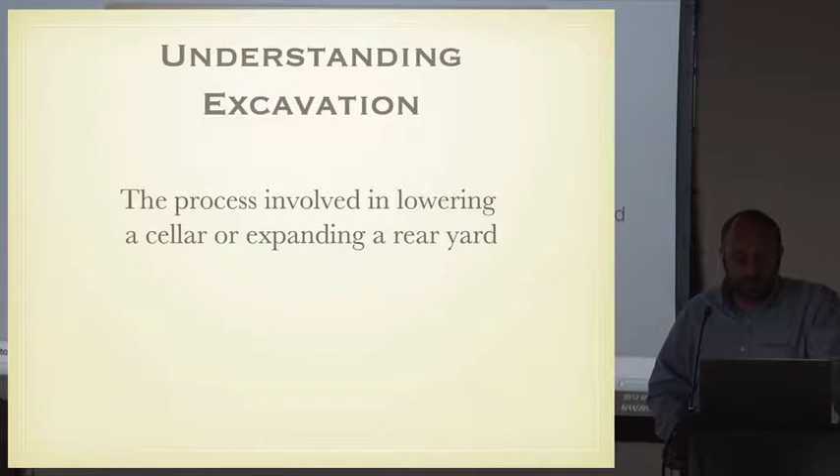So now, if a neighbor wants to do an excavation, they have to have a design. That's a great thing if you are the neighbor, because you get the opportunity to see something on paper before it goes into the ground.

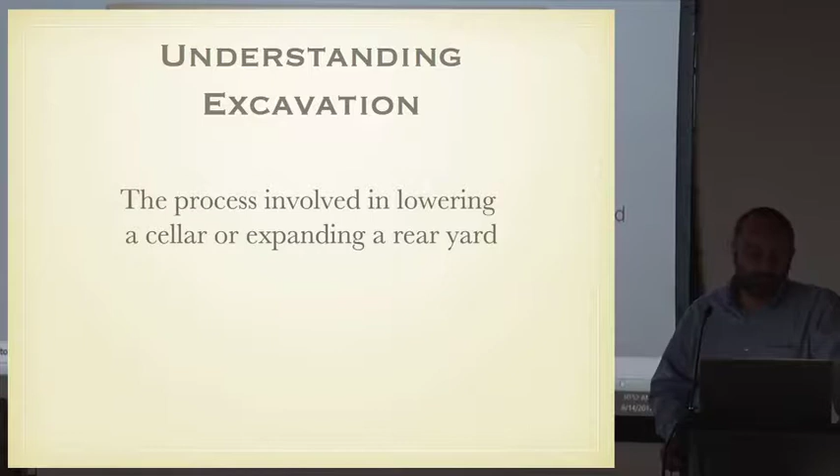So if this is an excavation that you are proposing, or if this is the excavation of the neighbor, the process is more or less the same. There has to be an investigation done first. That investigation requires doing physical probes at the site to gather data about the soil.

It also requires doing some probes above ground, which are things that Don or structural engineers usually look for. But for us, we do want to understand what the soil is, where the water is, where bedrock is, what existed previously on that site. Was there a 6-story at one point and now it's 3? Was there a 2-story at one point and now it's 5? All of these play a significant role in the design of the supportive excavation down the road.

So once the investigation is done, and this is required by code, a report would be issued to the client. And in the report, the geotechnical engineer includes a recommendation on what to do and a statement of what they observed at the site. Simple things.

Then we move to the design. The design involves support of excavation. Support of excavation is what allows the client or the neighbor to go down for a pool, for a batting cage, for whatever they want to do at that location.

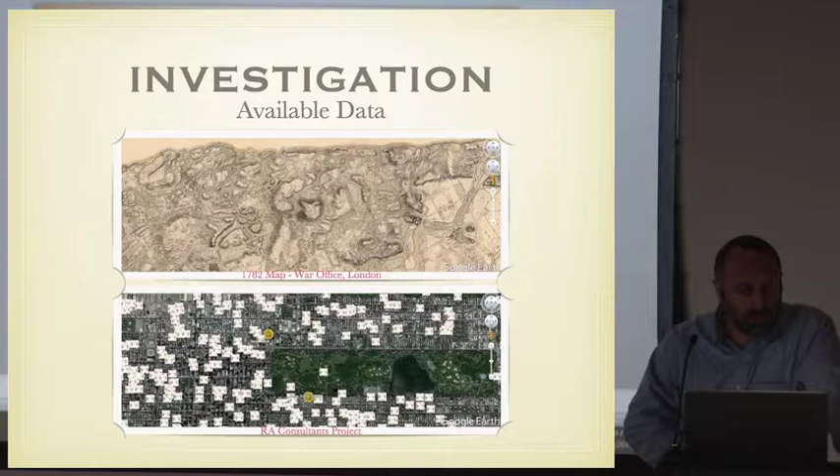That would be a machine drilling into the ground, sampling the soil that comes out. An engineer classifies it, figures out exactly what it is and how strong it is. As geotechnical engineers, we classify soils for material strength, not for environmental aspects. The environmental aspects are a completely different animal, which we're not going to discuss here.

When you do those borings, what's the schedule for how many you have to do? The 2014 New York City Building Code treats renovations as new buildings if you're changing the load by as little as 5%. So for any change on the load of the structure more than 5%, it's a new building. And if it is, there's a requirement for a minimum of 2 borings up to 5,000 square feet, with an additional boring for every 2,500 square feet after that. So a typical 20 by 100 lot, which is 2,000 square feet, needs 2 borings.

And if the addition is less than 750 square feet, you only need 1. There's a slight addition in the number of borings if this is a pile job, not a shallow foundation. They're all spelled out in Chapter 18 of the Building Code.

So the borings are very important. They tell us what the soils look like at depth. We go down to rock in many cases, or at least to a depth where all the stresses from whatever we're planning to do have completely dissipated, because stress dissipates with depth. So for a 1 cellar excavation, which is 12 feet deep, we will take the boring at least 40, another 30 feet give or take below where our footing is, at which point there's no change in stress on the soil.

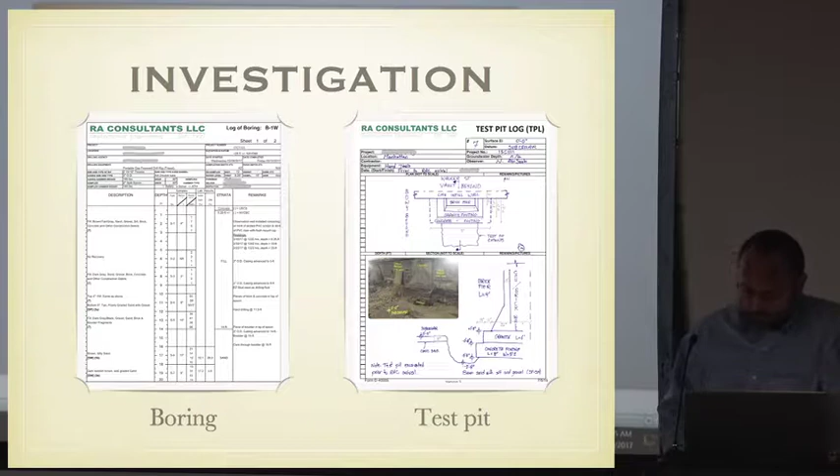So the investigation is documented in a geotechnical report. Not much is seen here, I apologize.

We can go do borings, we can go do test pits, and if you're the neighbor and you ask for borings and test pits because now you know that the construction has to have them, and they give you borings and test pits, they're hiding something. There has to be a report where these borings and test pits come to in context.

The engineer may say that I did borings, I found water, or I found organics, and I recommend that you do not do a shallow footing here. I recommend you go to piles, or I recommend that you do waterproofing in this area.

You need to know these if you're the neighbor. Obviously, you need to know them if you're the client, if you're the owner. But if you're on the opposite side, and somebody just says, okay, here are the borings, that's not enough. You need to see a report. If they don't have one, you need to ask them for a report.

And as a neighbor, you have the right to say no for anything. So you do not want the adjacent construction to affect you. Ultimately, that's the goal. You weren't looking for that construction. You don't need the noise. You don't need the vibration. You're not looking for compensation for whatever damage. You just want to be left alone, which is your right.

So you have the right to say no. However, saying no doesn't mean that the construction cannot go on. And that's where Don was trying to give his opinion, which I agree with. Sometimes it is beneficial to be part of that discussion. For example, in your case, I'm not sure how the construction transpired, but if the neighbor had provided a geotechnical report, or if you were involved maybe early on in the discussion and you had a peer review done for those drawings, there could have been a chance that some of the damages were minimized or eliminated altogether.

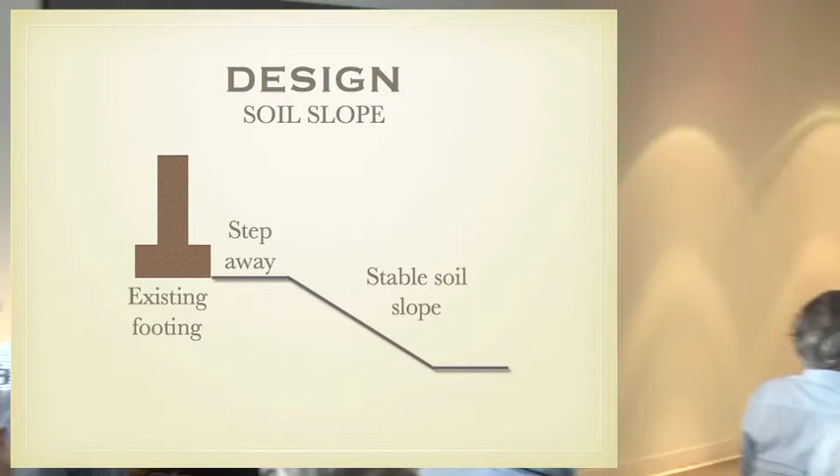Underpinning is usually the best way to support a building. We are constructing a new footing under an existing one, and then we are positively transferring the load from the old footing to the new, where at the end of the process, we know for sure that the new footing is taking the load. So underpinning that is done right is the best, when it is necessary by design. All the other alternatives are compromises, which oftentimes result in more movement.

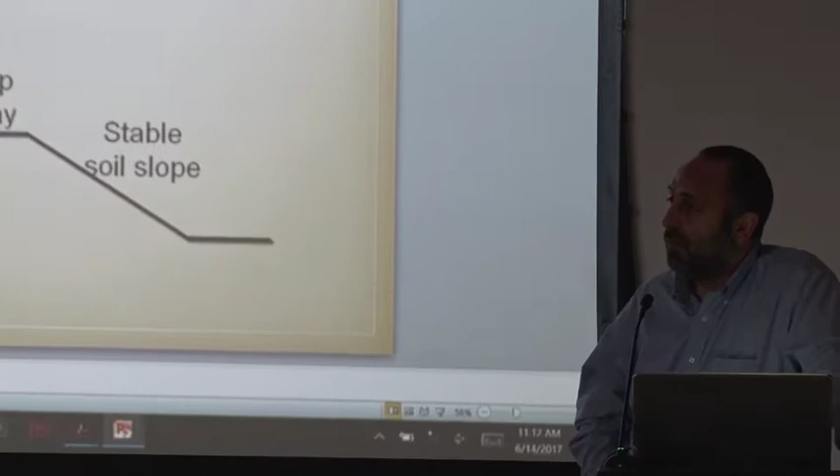This here, for example, is if we do not want to allow the neighbor to underpin. The neighbor has the right to step away, they're going to lose some space, and put their new footing somewhere here. This slope is defined based on what we know about the soil—sand will have a different slope than till, different from rock, different from peat, etc. There has to be a bench and a slope.

Oftentimes the neighbor wants to maximize the space, so this slope will go directly in front of the footing and it will be steep, maybe 1-to-1. Or even if it was flat, the excavation would be deep enough, or there would be water included in the mix, at which point there is movement that's going to result from this approach.

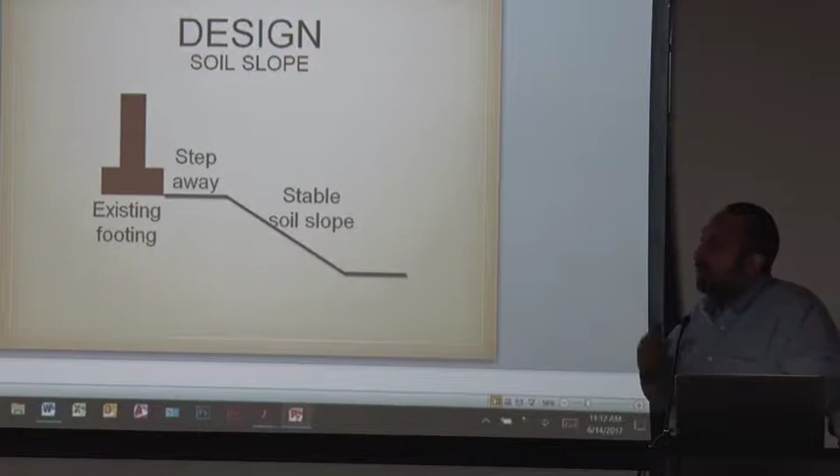This movement can also be addressed, so it goes back to proper design. Anytime any of this is going on, the wall needs to be monitored—vibration and survey—and if the movement exceeds, it doesn't even have to exceed the 1/4 inch or the 1/8 of an inch. If this was landmark, the engineer has to determine that a trend is starting to develop, at which point they can do something. The wall can be shored.

On a recent job where Don and I worked, the contractor had not put a shovel in the ground. For that particular job, we were both on the same side. We knew that the building was leaning, and it was landmark. We had transit authority to deal with. I advised the client that they need to brace the neighbor's building before they do anything. Don came in and designed an elaborate bracing system that supported the neighbor to minimize the risk of when we start to open up the soil.

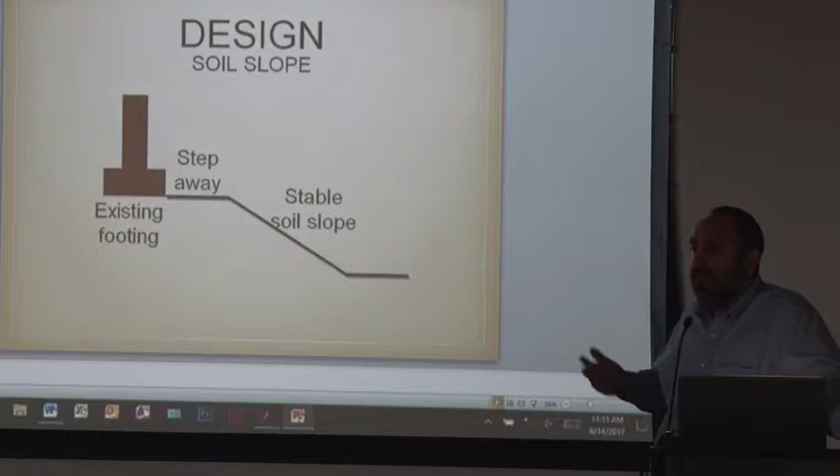And going back to what Don mentioned earlier, anything that we do at a site constitutes a change, and a change results in movement, so they can be careful. In that case, they may have needed to brace your building before they did anything. They can do it from their side.

So sometimes I would like to go a step back. It makes sense sometimes to agree to underpinning. Even though on a first look it may not sound very appealing, there is risk, but if you do agree to go into that process, you will have much more control over the outcome.

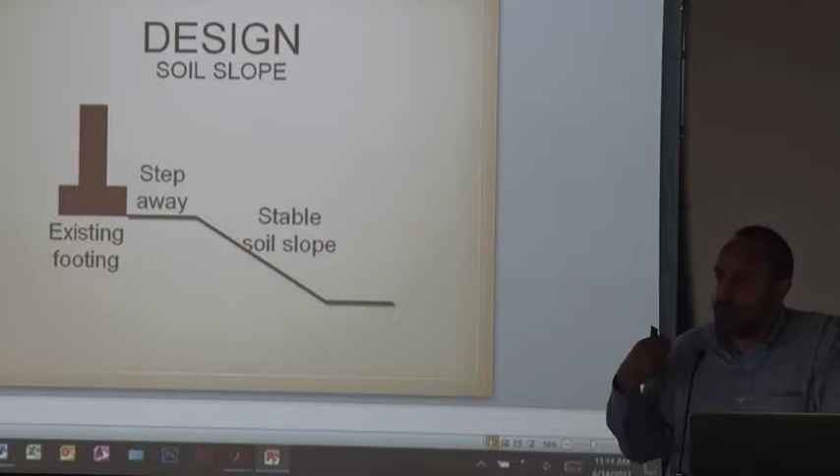You can tell them, I need the vibrations to be sent to my engineer—and I'm going to skip through slides—but all of these associated costs are typically paid for by the construction. So if you own that building, you're paying a consultant and a lawyer and an architect to review what the construction next door is doing. You have the power to have them pay for it, so it's not going to be like you're paying a lot of money out of your pocket to do that.

So when it comes to design, going two steps back, one option is to do nothing. So we excavate down, we find that the footing is 3 feet deep, and we're only interested in increasing our cellar height by 2 feet. In other words, we don't have to do anything. Excavate the 2 feet, we're not going under any of the footings, we're in good shape.

All the other options that I'm listing here, and there are more that I'm not listing, are a compromise. So we can do a segmental wall, in other words building a stiff wall in front of the footing on the construction side. This causes a loss of space, and there is some associated movement with it, which is more than underpinning. Soil slope, we just discussed, has a similar effect, losing more space here.

Rock excavation, by code—if the code specifies rock, it divides rock into 4 classes, Class A and Class B are allowed to be used with a straight rock face cut. So if you hear that the neighbor has rock, that doesn't necessarily translate into 'yes, go ahead and excavate, nothing is going to happen to my building.'

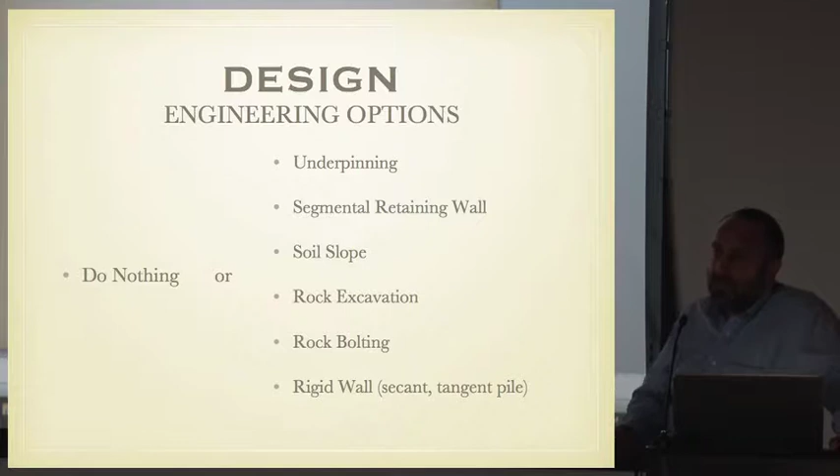And then there are other alternatives. This is a whole family of rigid walls, which includes secant walls, tangent walls, soil mix walls, etc. They're intended to be rigid, intended to carry the load from the building as the excavation advances. They do a decent job, but not good enough. You'll see those are usually associated with the most movement on the list I'm putting up here.

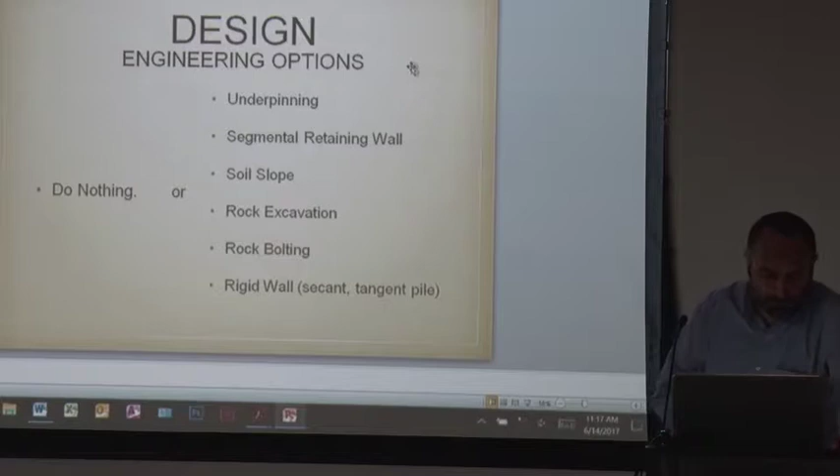Underpinning, for those of you not very familiar with it - we're going on, this is an existing footing right here, supporting the wall, party or not, in this case it doesn't matter. We're going to excavate adjacent and then tunnel underneath, excavate under the footing, and pour this new concrete footing underneath. The width of it has to be minimum 2 feet. If this footing is more than 2 feet, then the underpin has to match the footing - it could be 3 feet, 4 feet, 5 feet. The width of this underpin has to be minimum 2 feet, but it has to match the footing also.

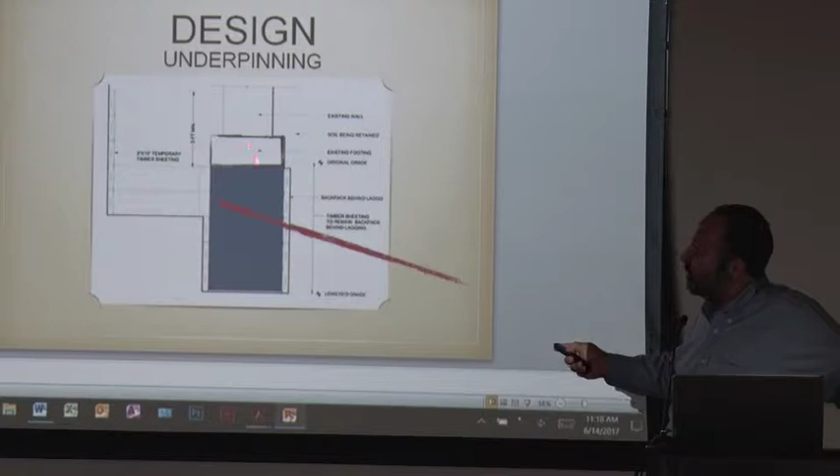So we cannot take a footing that is 2 feet and make it 1 - it doesn't make sense. Also, this footing was sitting on some soil - could have been sand, fill, whatever. We have to always take the footing from a condition to a better condition. You cannot go from a condition to a worse condition. We always have to guarantee that. That's why underpinning, if done right, is always the best option moving forward - because now we know for sure that this building that was sitting on 3-ton soil before we started is sitting on 6-ton soil when we finished.

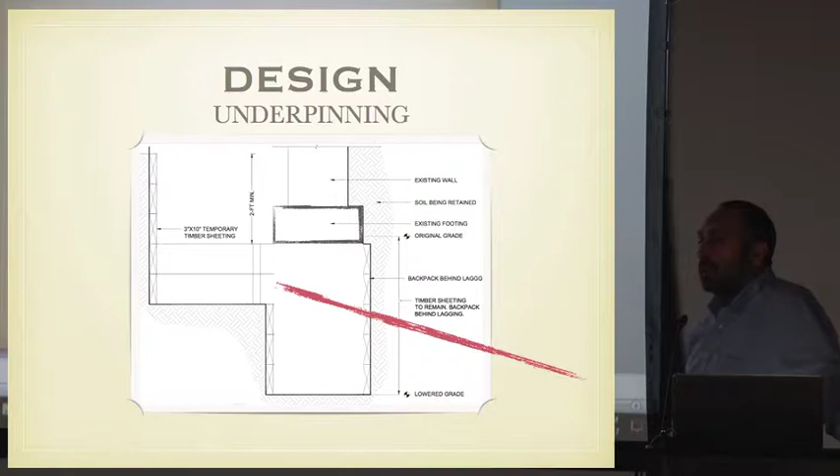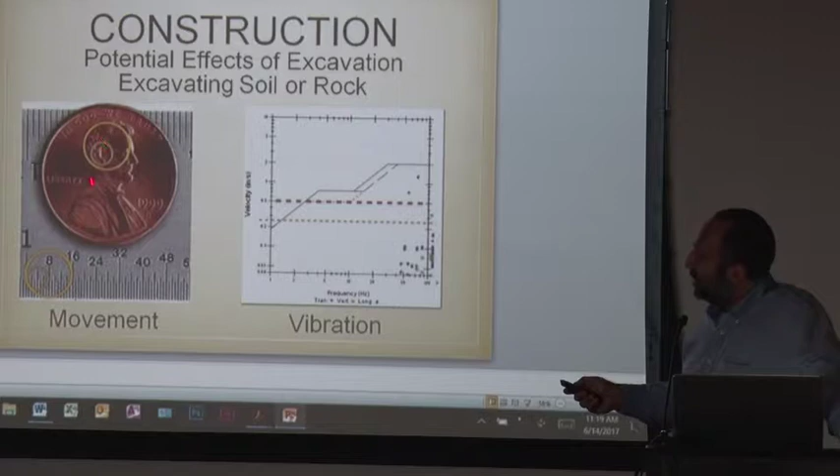So how much movement is allowed on the adjacent structure? For landmark buildings, very, very little. The yellow circle is the maximum movement allowed by code, which is a quarter inch - so this is how it sits on a penny, covers Lincoln's head. The smaller circle here, which covers his ear, that's the warning. If movement happens in excess of that, construction has the responsibility to notify the neighbors that something is going on - pay attention, change. If it reaches the yellow, a quarter inch, construction is supposed to stop. This is all spelled out in the code, chapter 33, and in the TPPN 10/88.

Back to the TPPN 10/88 - now the DOB considers the 2014 code as a replacement for TPPN. Like Don mentioned, they didn't capture every aspect of it, so you'll find especially in historic buildings that engineers will reference both. The DOB wants us to just address what the code has, but we still have some issues that are not covered by the code - we refer to TPPN. TPPN is especially useful when we're dealing with rock excavation. It doesn't really apply that much when we're dealing with soil excavation, soft stuff, but rock is where vibrations come into play, and that's where TPPN applies.

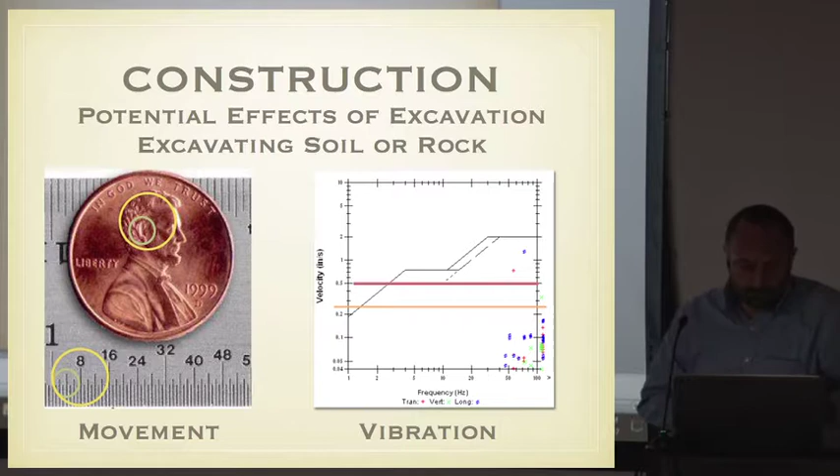So back to underpinning - underpinning has to be done in patterns. If we open under the entire wall at once, the wall will move down, guaranteed. So what we do is open in small sections. The width of every underpin is limited to 3 feet if the footing is rubble, and limited to 4 feet irrespective of the condition. So no more than a 4-foot opening, and this is based in great part on empirical data.

Underpinning has been done for many, many years, hundreds of years, and when the excavation starts to exceed the 4-foot mark, the building experiences more settlement - the chances of movement increase. So in the city, it's either 3 feet or 4 feet - this is the standard, and it has to be constructed in pattern. The patterns are such that when 2 pins are constructed, there is always a space between them big enough that there is no effect in the stress. That space is usually 12 feet.

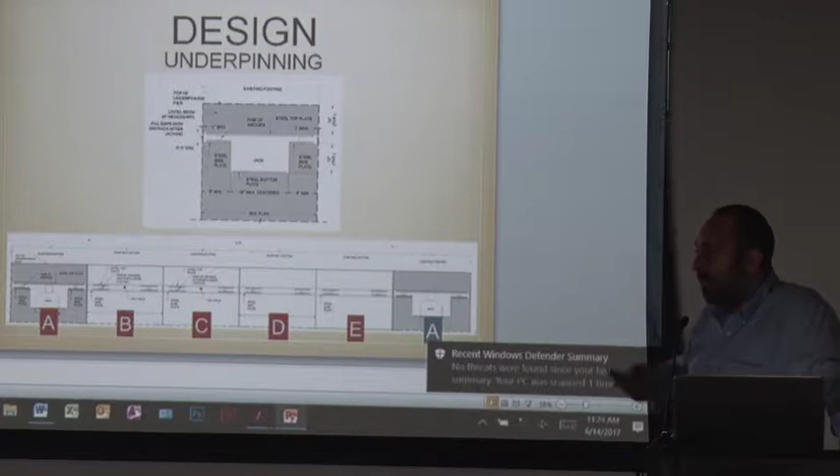The purpose of jacking is not to move the building up. The building is serving here as a weight, a counterweight. The purpose is to push the pin down. Once this jacking happens, this space here will open up more than it actually is, until such point that we start to see the slightest upward movement, which is defined by code as 1/16 of an inch, the thickness of a hair.

Once we see that the building moves up a hair, we stop. Then they shim it, they wedge it, and they come and fill this void back with concrete. This is the guarantee that the pin is not going to be moving ever again down. So it would have been, at that time, experiencing much more stress than the weight of the building.

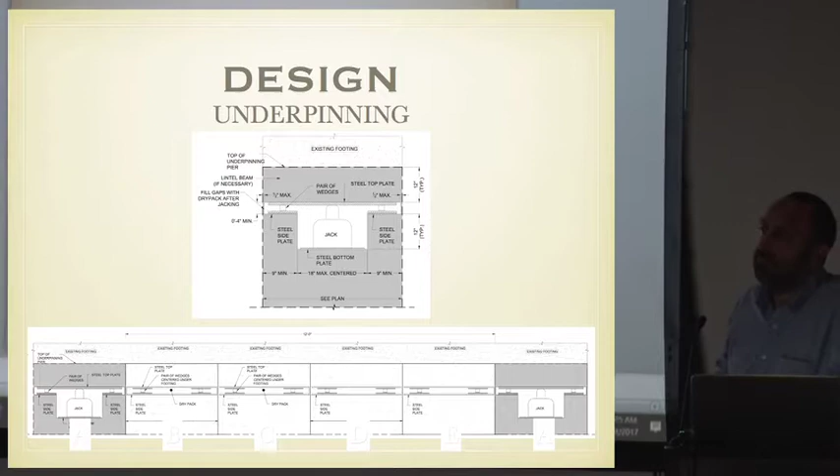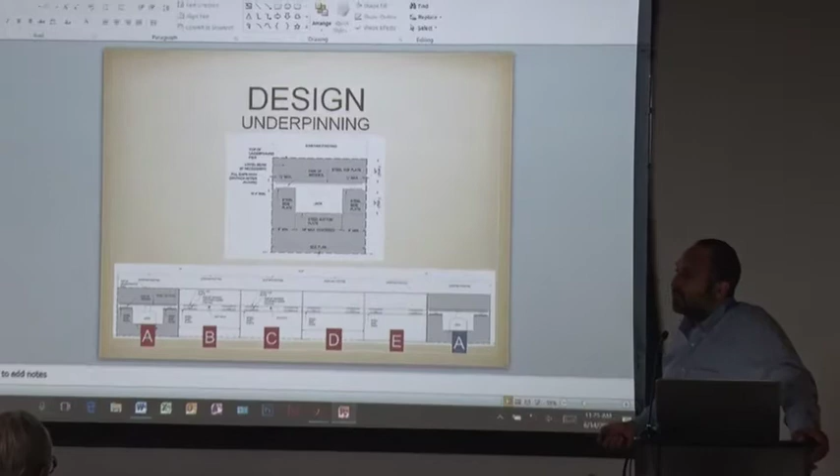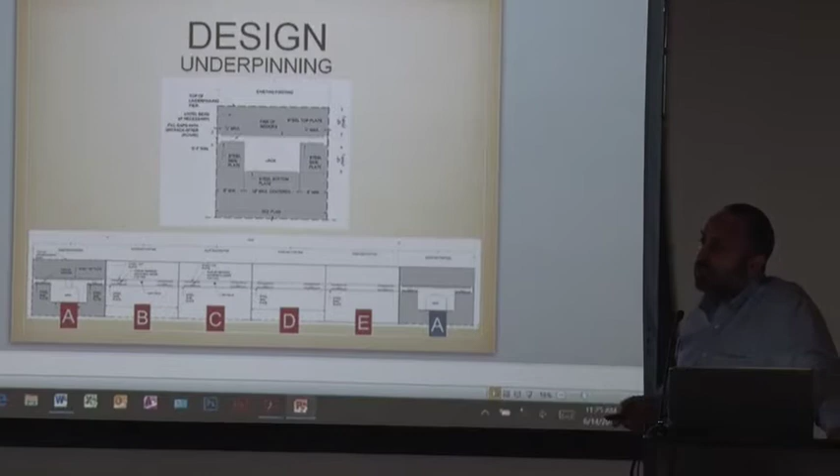Is this detail in response to the earthquake zone that we happen to be in New York State? Not necessarily. So this would work for California or India? This works anywhere. This detail is not tied to a specific earthquake zone. This is an intermediate process that provides us the confidence that the underpin is doing its job. The jacks here are shown on the A's only, but the jacks can be shown on any other combination. It's just an example.

So segmental walls, this is the construction of a concrete wall in front of the neighbor. So we're losing space from our side.

The appeal of this option is that the SOE, which is the temporary support of excavation, and the permanent wall are combined into one. So we are constructing the permanent wall at the same time as the SOE, and that would be 2 foot thick. The alternative would be to do an SOE, which is 1 foot thick, and then come and install a new structural wall in front of it, which takes space. There is a small savings in space when we use this approach.

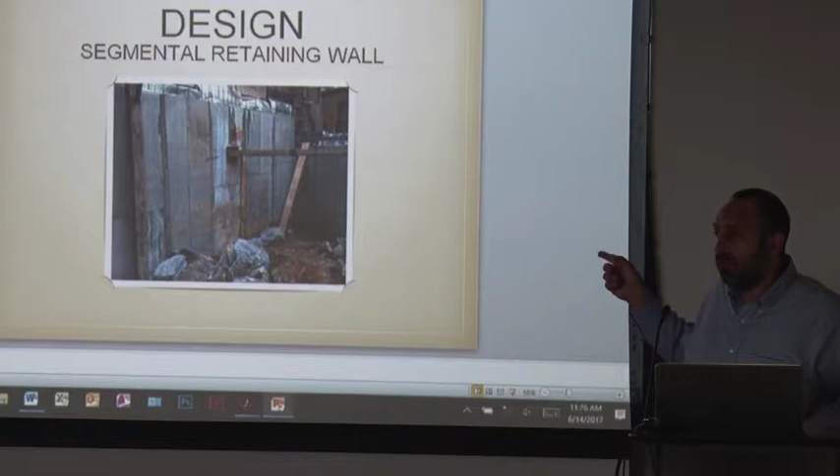And if it's designed properly, the likelihood of movement with this wall is more than the likelihood of movement with underpinning, but less than all the other rigid walls that I mentioned earlier.

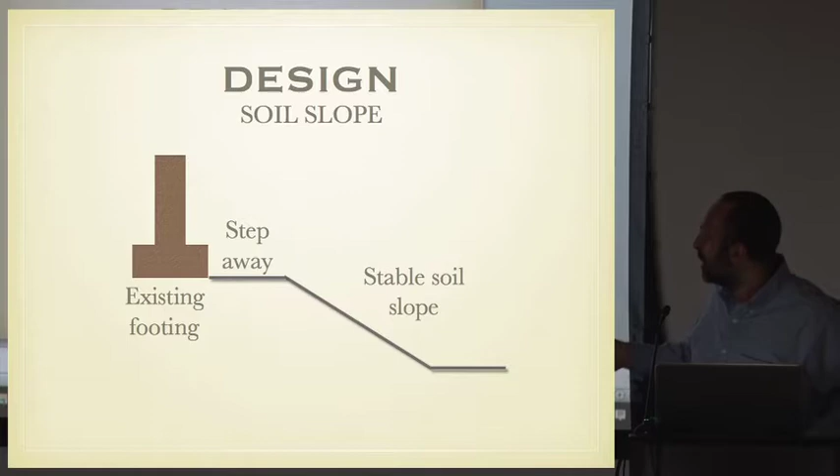We went through the sloped excavation. This comes at the most loss of space. Here you're spending the least amount of money because you're not doing anything here, just excavating. You're losing a lot of space, and it's not a guarantee that movement is not going to happen.

And then there is rock excavation. In the Upper West Side and in the Upper East Side, rock is relatively high, so this is quite common. There are two types of rock excavations that I need you to remember if you're dealing with these kinds of issues. There is saw cutting and there is line drilling.

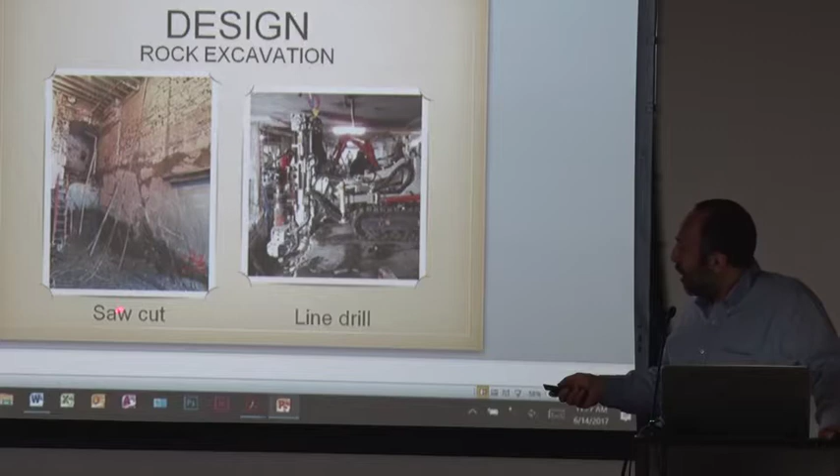Whenever we're dealing with rock, one or the other has to be implemented in order to minimize effect on the neighbor. Our job as engineers is not just to design. We don't go into the design intending to vibrate the neighbor unnecessarily, or to move their building unnecessarily. Our design is usually to minimize the risk on our client and on the neighbors. It's our responsibility as professional engineers to protect the public.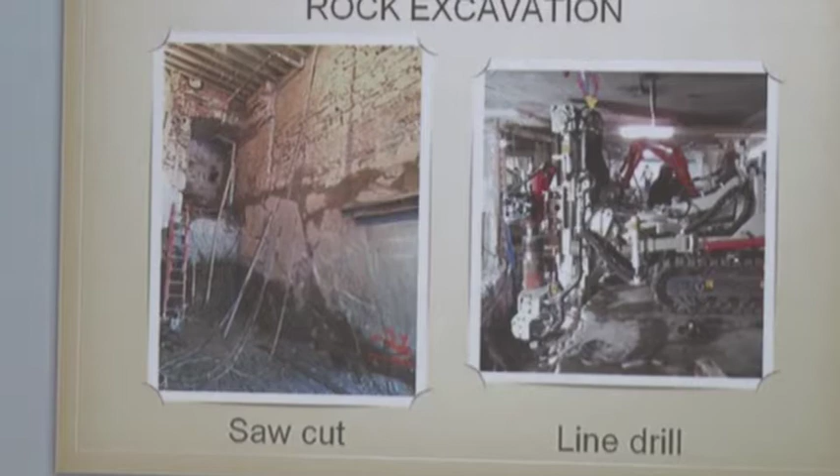So you will see on drawings often that the face right next to the neighbor has to be saw cut. Saw cutting, just what it means, it's a chainsaw or a circular saw that can be handheld or operated by rails attached to the face of the rock or by an excavator that will go in and smoothly cut the face of the rock. If I was to zoom into this picture and it was good resolution, you'll find that the face of the rock is very nice. You cannot distinguish it from good concrete. And this here happens to be 1A rock.

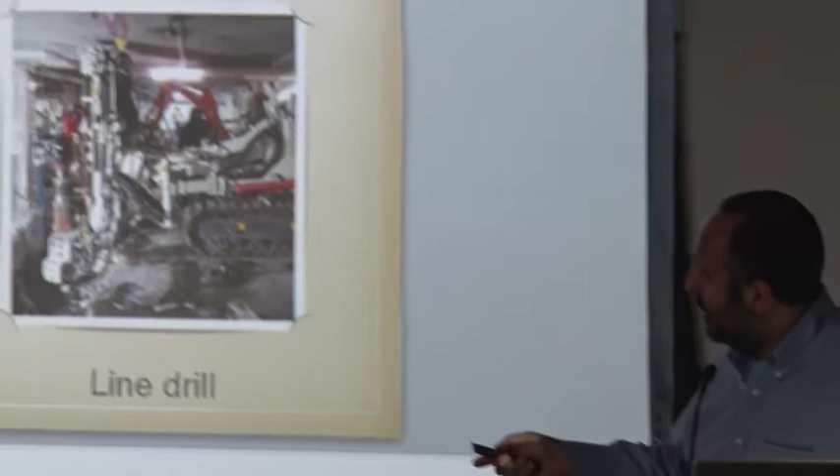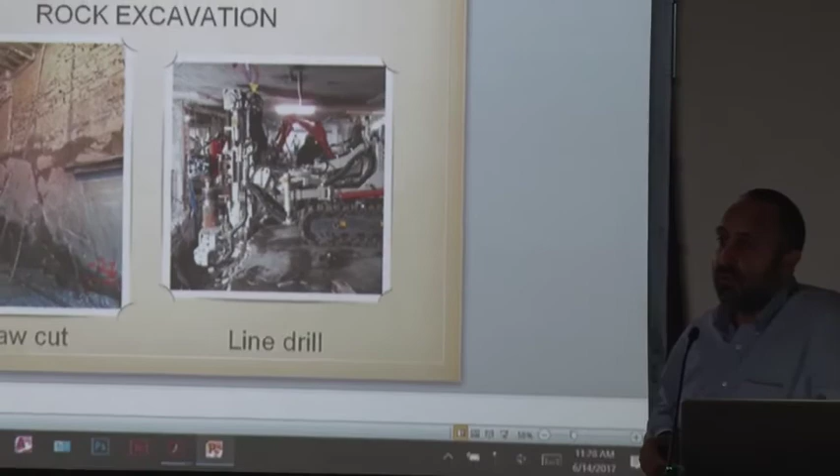The other option is to do a line drilling. A machine, sitting inside a confined space, will go and drill a hole next to a hole, next to a hole, next to a hole, right around the entire perimeter where rock is to be excavated. The idea is to create an air gap. So when they go in with a jackhammer, there is a separation, and the vibrations introduced into the rock to break it by the jackhammer are not transferred to the existing walls, into the neighbor's building.

If this is not done, if saw cutting is not done, and if line drilling is not done, then anything that they do with the rock will cause the buildings to vibrate. And the human senses are much more sensitive to vibrations than the buildings, so humans will feel it right away. And then it's only a matter of time before things start shaking off of shelves, paintings start falling off of walls, and things start moving. So these are necessary, very necessary.

One more thing regarding rock excavation. Groundwater table wants to be at elevation 0, that's where the sea is, or elevation 5, depending on which datum you're looking at. So whenever it gets a chance, that's where it wants to be. If rock is high, which is the case in many sites in the Upper East and the Upper West, water will be flowing on the surface of the rock down to the river level. That's the way that it goes.

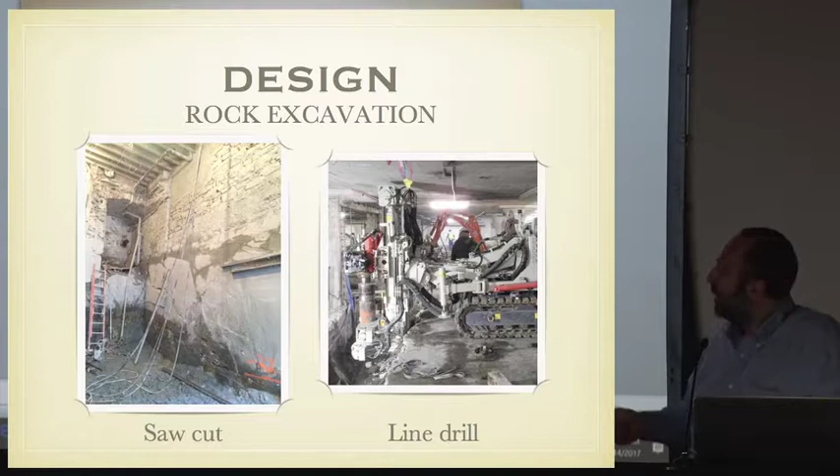So if we go and open up a cut into the rock, it becomes like a swimming pool. There will have to be constant pumping of water from that rock excavation during the time that it is open. This water does not necessarily affect the adjacent neighbors negatively. It's much different than if this excavation was happening in soil under the water.

If we are excavating in soil and we have to draw the water down for the excavation to happen, every foot of water that we draw down is the equivalent of adding a story onto the neighbor's building. So if we're drawing down 5 feet of water, we're adding 5 stories. History is on our side in this regard, because most of those buildings have seen a fluctuation of 3 feet, which is normal rain events, water surges, etc.

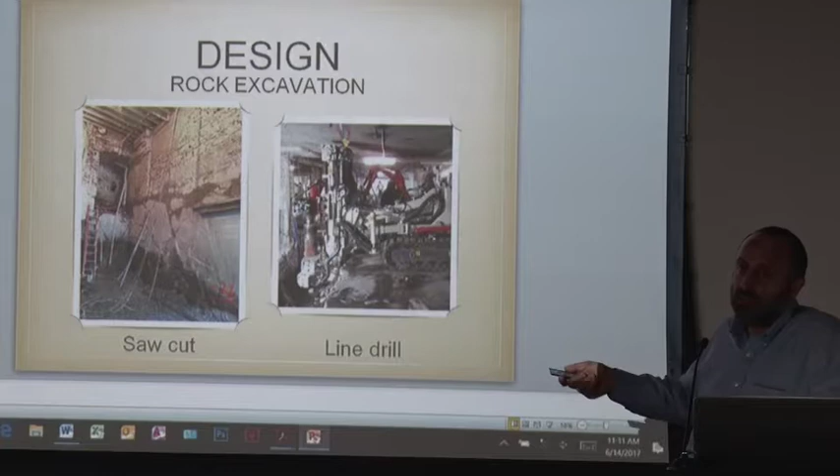So if we are just playing with the water table by 3 feet, give or take, the buildings have seen those changes in stress and it wouldn't affect them much. But if we're going 10, 20, or 15 feet, then there has to be a cutoff wall where we keep the water outside our excavation at an elevation that's not changed, and we're only pumping the water out from inside. This is what rock does for us here, just by virtue of being there.

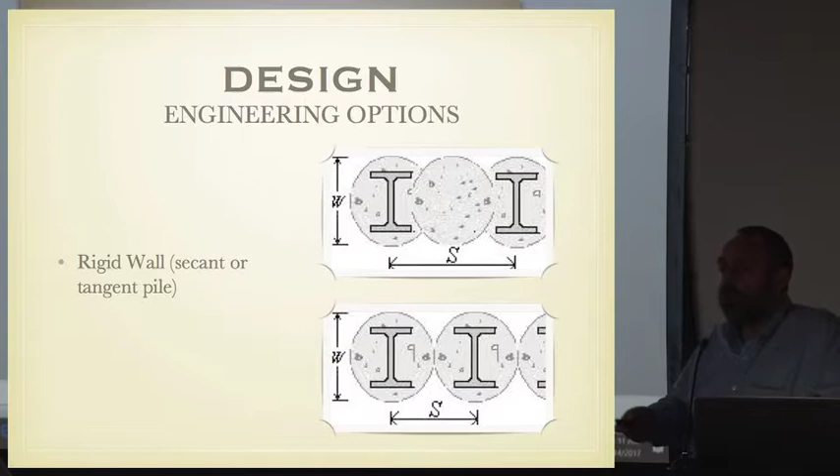The construction team, your neighbor, or you want to stay away from them as an owner because they're very expensive, much more expensive than underpinning. So if you're the construction owner, that is your motivation to not do these. And if you're the neighbor, my recommendation would be, if the neighbor does that, then you're guaranteeing yourself movement. You're much better off allowing them to underpin.

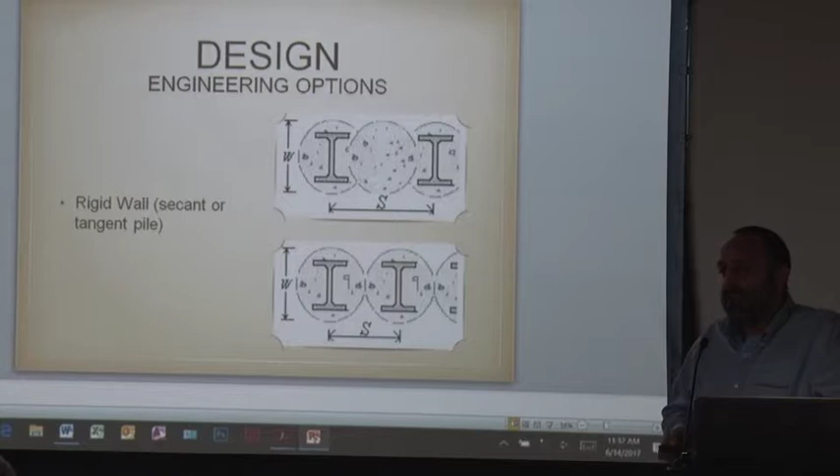There is one other thing for underpinning that's very rarely discussed. If the neighbor is planning to construct a cellar and a subcellar immediately next to your building, going 20 feet down, by virtue of them doing the excavation, this allows you in the future to excavate down to match them with minimal supportive excavation on your side, because they've already done the work. So that's a plus that's usually hidden. If you don't want to use it now, that's fine, but you have that potential. Somebody has already done the work.

Also, when the neighbor excavates under your wall, or just exposes a wall that was buried without even going under it, it is their responsibility to waterproof their wall that's coming up, and your wall in turn. So if they're going under the water, and there was a discussion earlier about more water coming into the basement as a result of the construction, somebody's doing something wrong.

There are two ways to deal with water. One way is to resist it in place. That requires constructing a watertight space under the water, which we refer to as a bathtub. It often includes installing blindside waterproofing in such a way that no water can go in, and that's a scenario where you do not have to pump.

However, that's an expensive way to do waterproofing. Oftentimes when somebody's spending $15 or $20 million on a pool and batting cage, they go that route because they don't want water coming in. But sometimes we're just flirting with the water table, very close to it. It's not going to affect us all the time, or maybe it's going to affect us, but only for a month of the year, and there are alternatives that are cheaper.

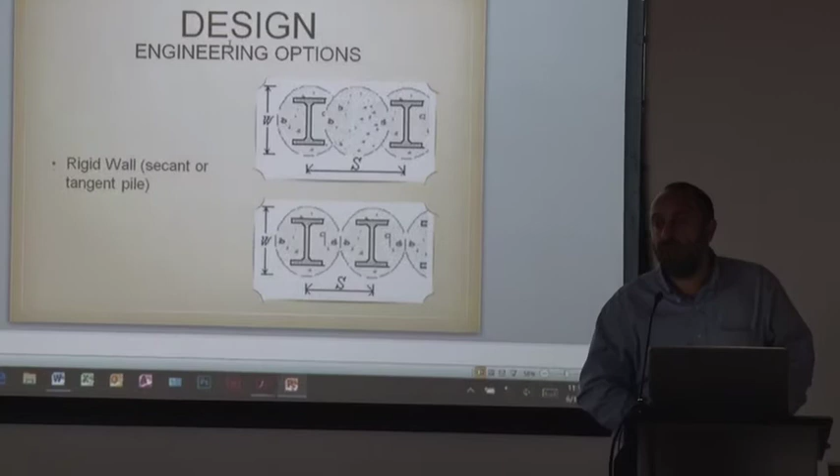When dealing with landmarks specifically, usually we're working inside existing buildings, which means we have limitations on what kind of equipment we can bring in, making constructing something like a secant wall or tangent wall extremely difficult. These walls require machines with enough power to drill into the ground. So even though those can double as SOE and structural, they're not usually doable within the confines of a landmark building. That's where I brought in the segmental wall.

The segmental wall design - we've done numerous of these walls successfully. We use them often in rear yard expansions, much more so than immediately adjacent to 4 or 5 story brownstones, because in the rear yard we have more tolerance for what movements we can expect. And they double as SOE and structural wall.

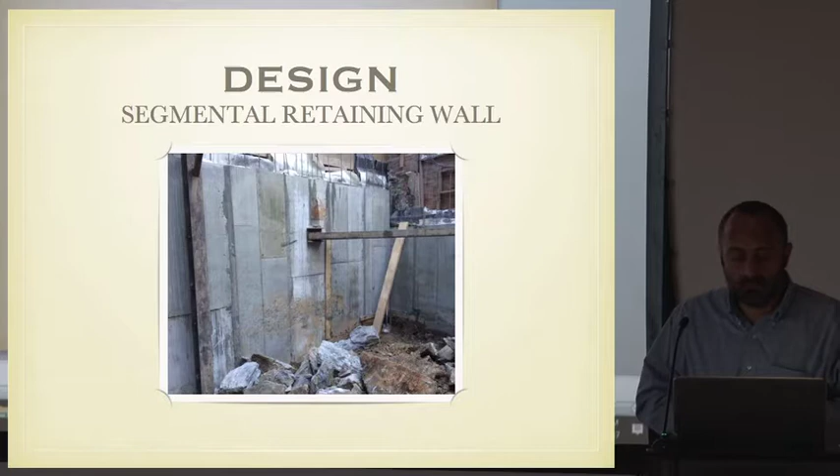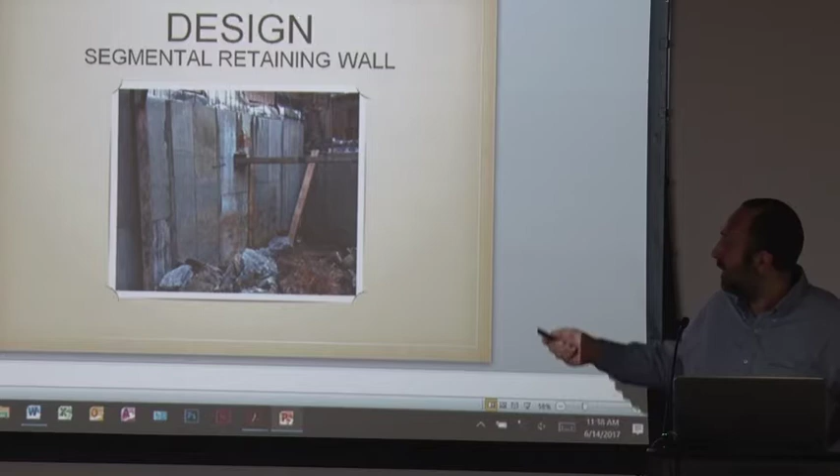You can also see, if you look here at the top, there is waterproofing behind it - blindside waterproofing behind that wall. It's constructed in sections as the wall comes into play. This wall is constructed in vertical sections, so 1, 2, 3, one next to the other, like that.

I think we're running out of time, but I'd like to jump to the conclusions.

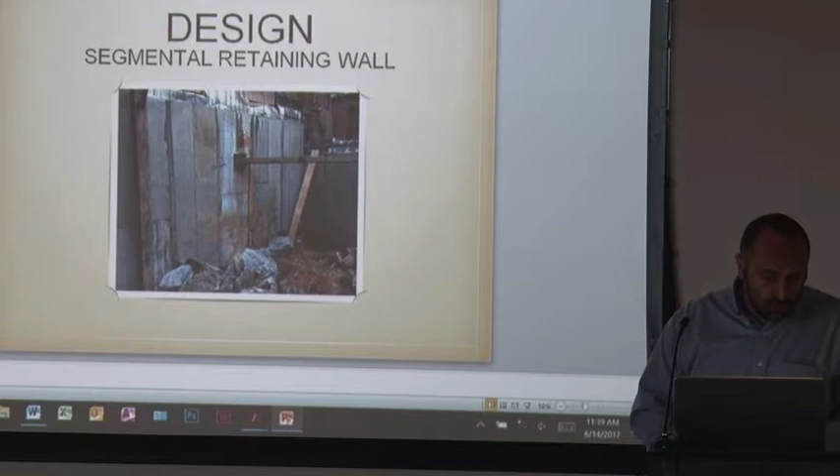There are many issues during construction. If you're dealing with a competent geotechnical engineer, structural engineer, and a competent design team, you'll find that during construction, that engineer is at the site much more than you think they need to be. That's not because they're doing something wrong - it's because that's when you need them there. You need the engineer at the site during construction. The design can be very good, all the T's crossed and I's dotted, but construction is where problems happen.

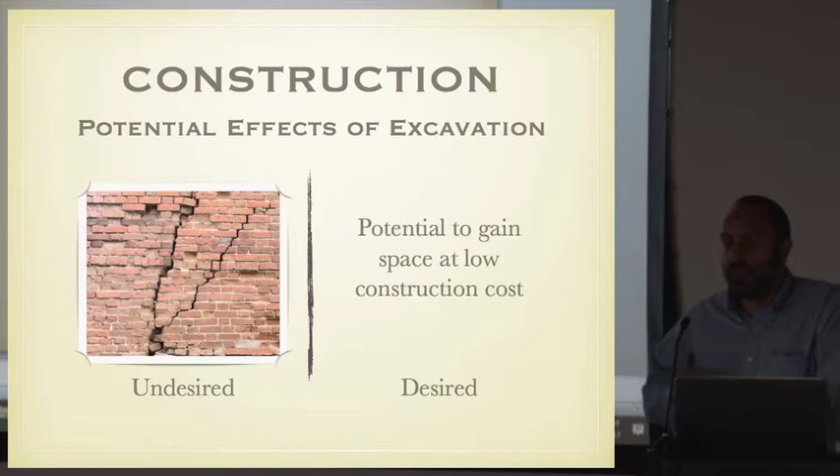So you do not want to have issues like this happening in your building. If they do, they can be fixed - you just don't want to go through that experience. It's not enjoyable, and it can be avoided, which is just as important.

You want to be in a position where the neighbor comes in, puts their foundation, goes out, with minimal effect to you, and you want them to do it very quickly. If somehow this can be facilitated, whatever that means, then you're gaining from it, and gaining the potential of, in the future, at some point, expanding your space, which is tremendous. You don't have to put as much effort into it anymore.

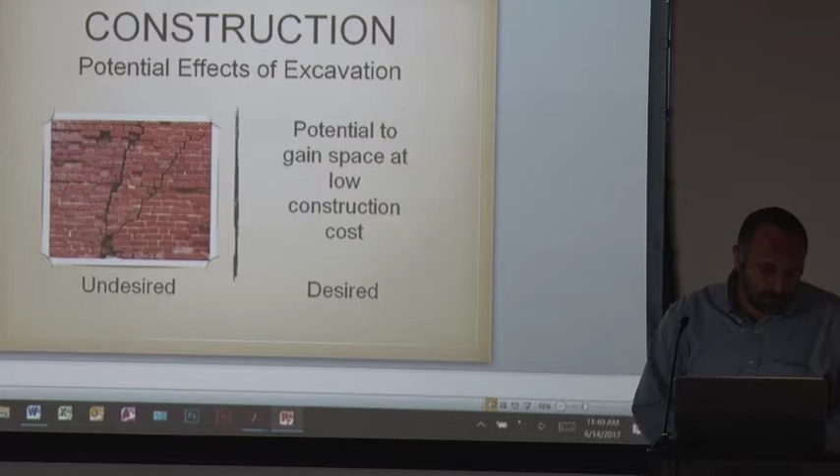If everything else fails - if you have an engineer you thought was good, but they got busy, or sidetracked, or got married, or traveled, whatever, and you cannot find them - just call the DOB. The DOB does not have enough staff to support everything.

The way that they operate is they go sporadically to job sites, and they rely on phone calls. Somebody complains, like the squeaky wheel, it's going to get the oil first. Someone complains, the DOB comes and visits, and they investigate.

You don't want to complain too much or prematurely, because that will hurt you. If you complain once, twice, three times, the third time they'll say Joe Schmo is complaining again, we're not going. So you don't want to be in that position, but you can always call them and they will come. Usually the excavation unit will send somebody within the hour or within a day. They will take a look, and if they agree with what you're telling them, they will stop the job until you get the opportunity to get an engineer or to review the condition.

And I'd like to leave you with that.

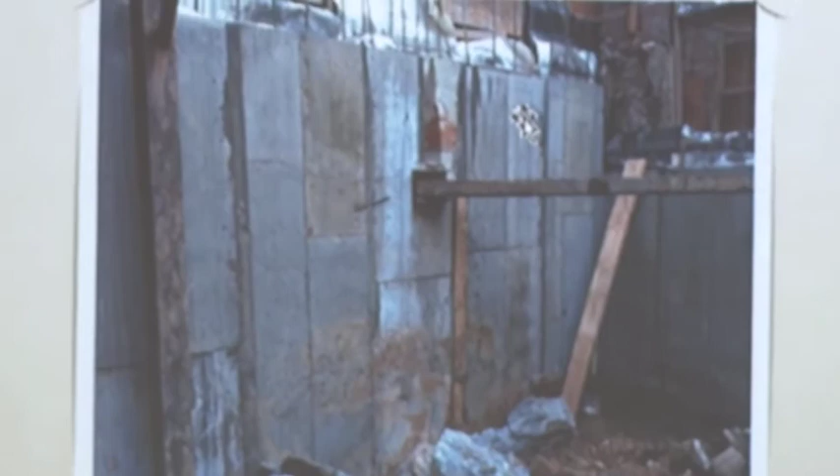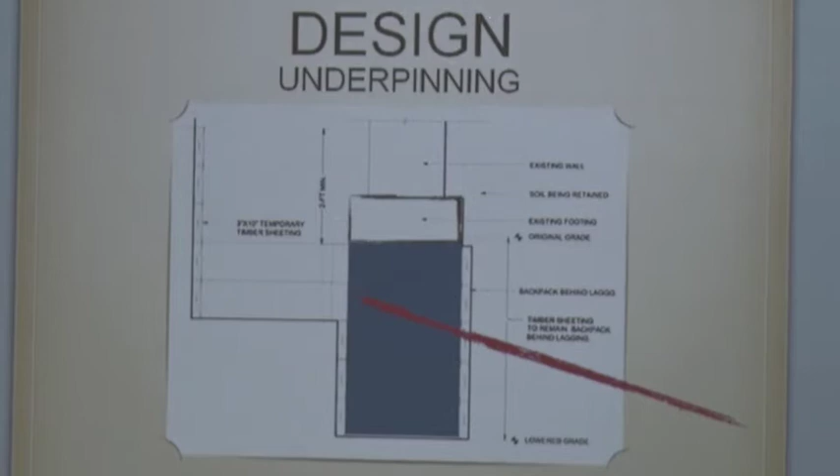The construction—I'm going to go to the underpinning detail. So this is a typical underpinning detail when someone constructs an approach pit and they go under the footing and construct new footing, which is the underpinning. This red line here is a tieback. Sometimes we need it if the pin is too high. If you were to assume that this wall doesn't exist, using the same concept, this is a 4-foot wide timber sheeted box. Somebody can excavate—this length here can vary, it can be 10 feet, 15, 20. They'll go down this entire length. You have timber, so technically there's the thickness of the timber that's always going to be at the property line—2 inches lost. But the wall can come and sit in here without the footing on top, and the timber stays at the property line here. And then the next section comes in, and the next section comes in.

And if there's, say, a two-story slab on grade addition where you're proposing to put the timber—this is a neighbor of mine actually proposing to excavate 11 feet down, basically right along the property line. How would they actually do that excavation and support my structure? So the best option is to underpin.

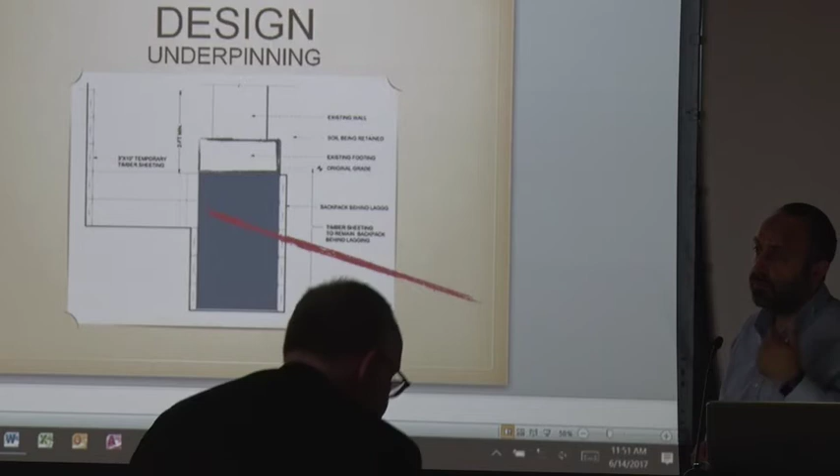That is the best approach, because this way you get the guarantee that your building now has new footing. The second best option—so that would be actually on my property? Yes, completely under my property? Correct. They will go—let's say this is the wall of the addition—they will go under the wall. So your property line would be right here in that case. And then they will construct their construction on the other side, on their side. But the next best approach is, this is your footing and the property line is right here.

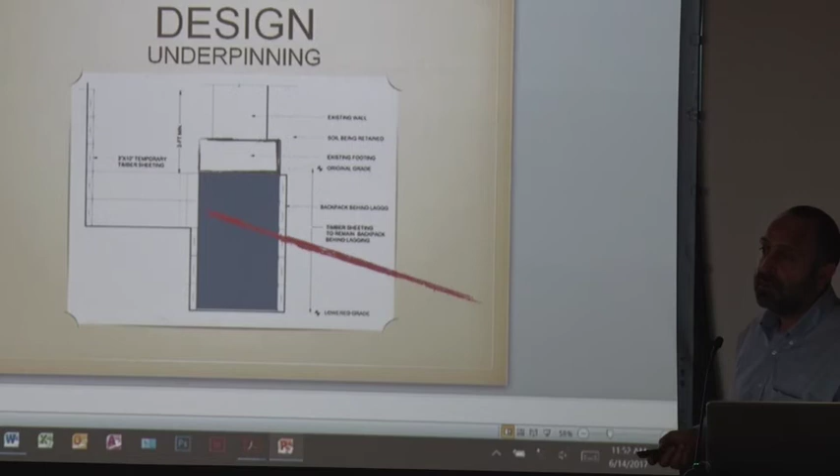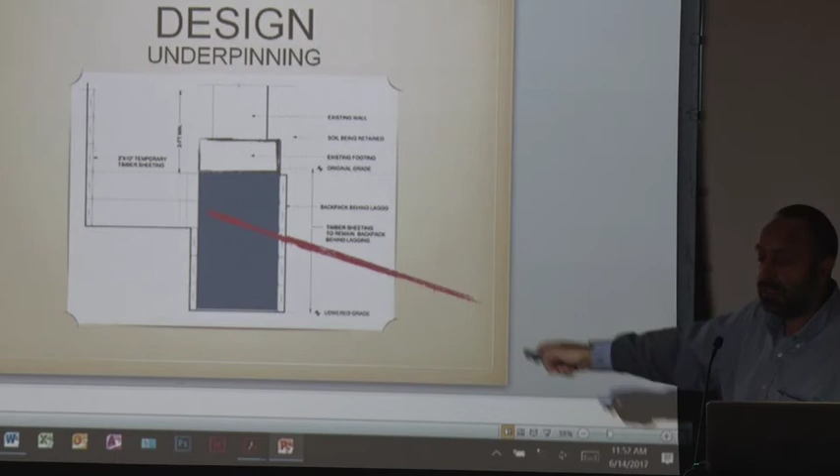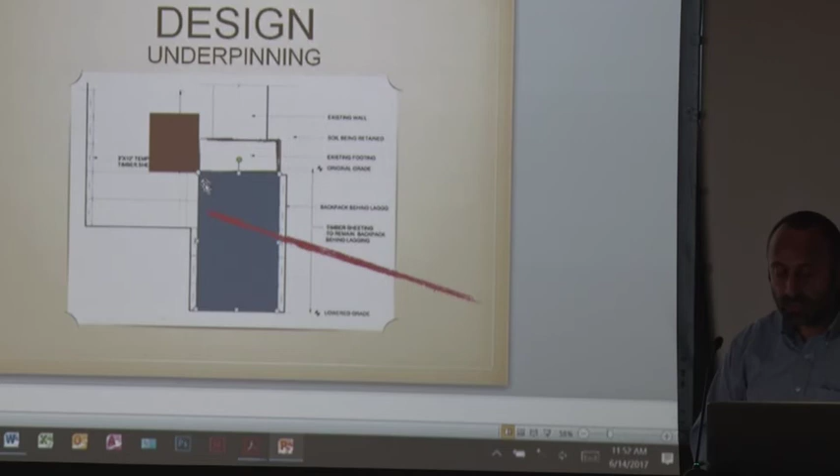So then they're going to come and your slab can be considered as a footing, and they're going to go and construct—they're going to be constructing this right next to your footing. So your footing is sitting here, right? So there's going to be—you're going to expect movement. So your footing in this case is here, and you want them to construct this pin on their side. Their footing doesn't exist in that case—there's nothing there yet. So you want them to construct this wall. This is the segmental wall that they're going to construct on their side, right next to your footing. That is going to result in some movement on your wall.

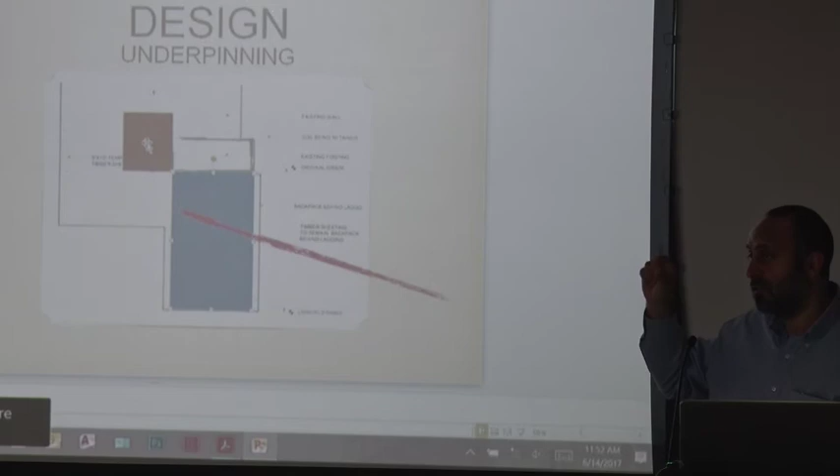You landmarked? No. So if you're not landmarked, they're allowed to move your wall half an inch. Half an inch—not just Lincoln's head, the entire penny. Hire him. Hire him for sure.

Geotechnical guy. So if I said, fine, go ahead and underpin under my slab—would they do that in sections? They will do it in sections, horizontal. Height-wise? No, you don't want that. They would do the full 11 feet—you want them to do that. You'll find some designs out there that say underpinning can be underpinned, but you're just adding the errors, multiplying the error. So you don't want that. You want them to go in and construct the underpin.

There are limitations. The deepest underpin that I've seen constructed is 24 feet. If somebody's going deeper than that, they may not be able to get it done in one day, so there's also that restriction. So 11 feet is doable, 20 feet is doable. A 40-foot underpin is not doable—something else needs to be contemplated for that.